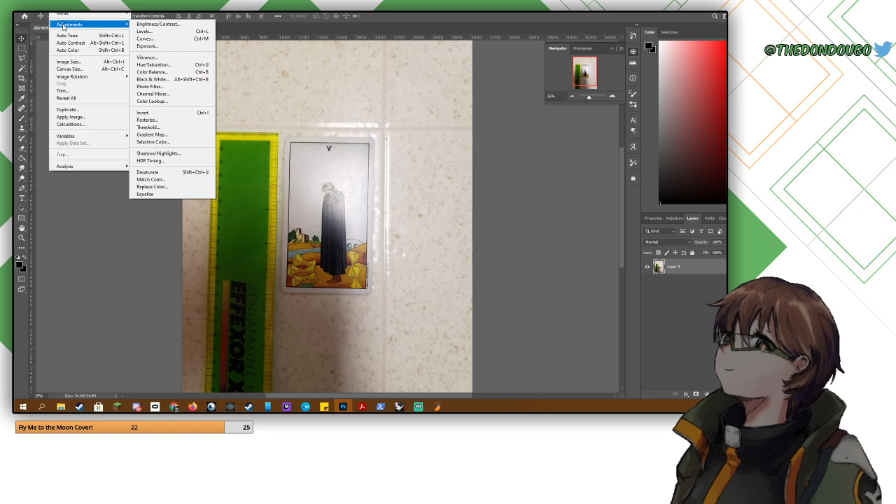First things first, I need to get this image to not be in perspective. And I have done a great job in forgetting how to do that. Image... perspective warp. I know. I know Photoshop.

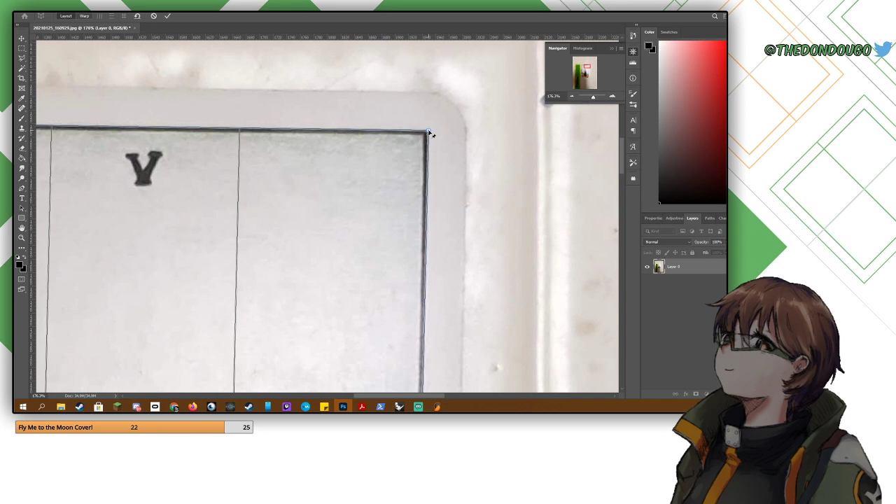Going to be using the outside for the perspective. There we go. And lastly, that right there.

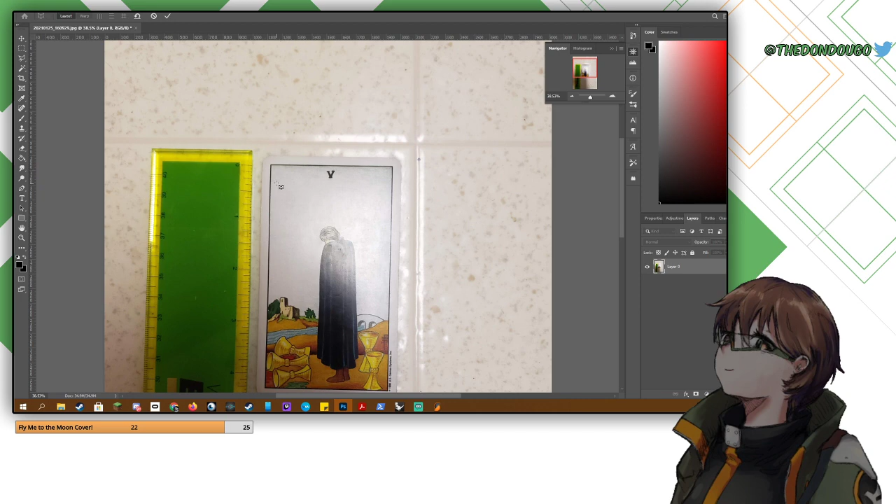Fudge, I botched it. Try again. Edit, perspective warp. Okay, is that where we want it to be? There we go, want that to be right on that corner.

That's gonna go down here. And then this wants to go in the bottom corner. Now that that's placed, zoom out, and for warp, that's what it is. There we go.

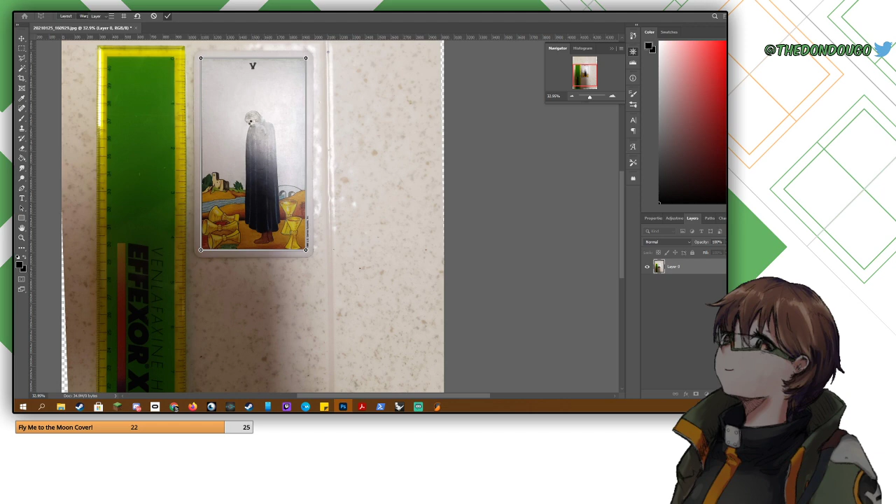Check. And then we can crop to like there. And save. File, I need to save the image. And then we can go into CAD. I'm going to put it in downloads because I'm lazy. JPEG. And okay, that's Photoshop done.

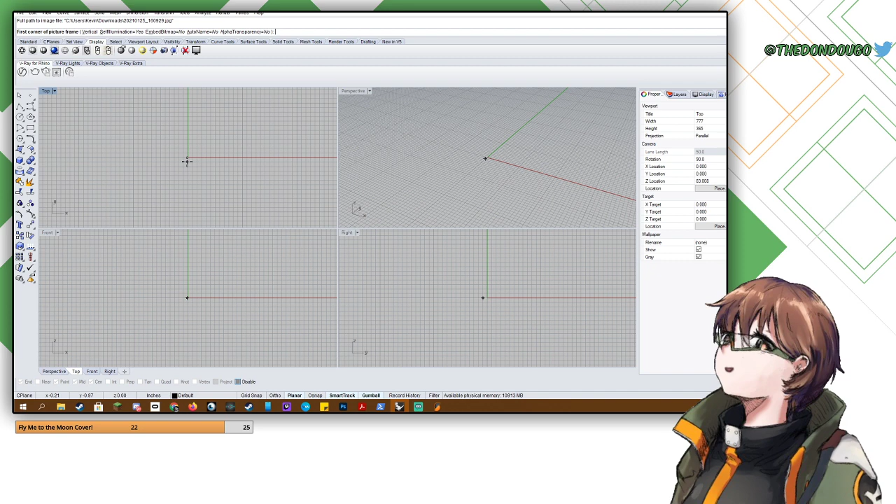Over to 3D modeling land, where first things first, we drop in our picture. Here we go. Now we need to get measurements. So what we have is we have a ruler that goes to, I see 4.5 inches. Let's just do that. Do 4.5 inches.

We need to scale this down. Where's OSnap? We need to make sure we can select the endpoint. We go down to where we think 4.5 inches is on the card, which is about there. And then we set this to, where's the end of that line? There it is. That's not quite right, I think I might have...

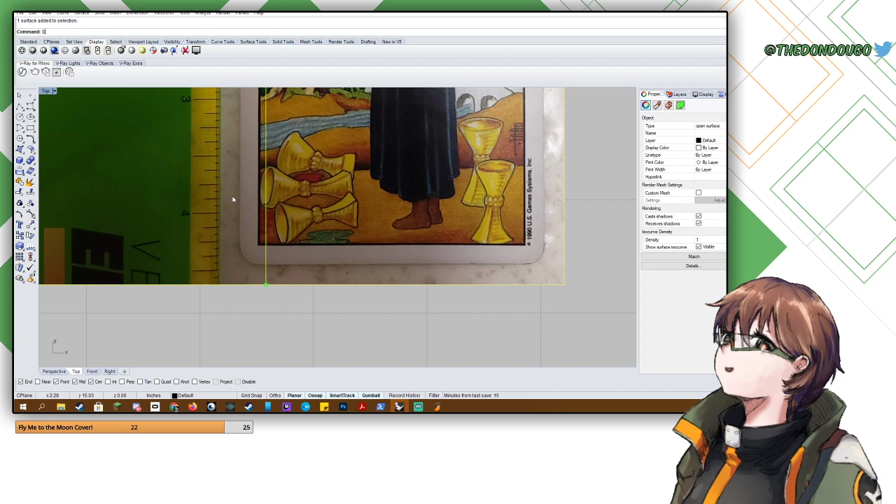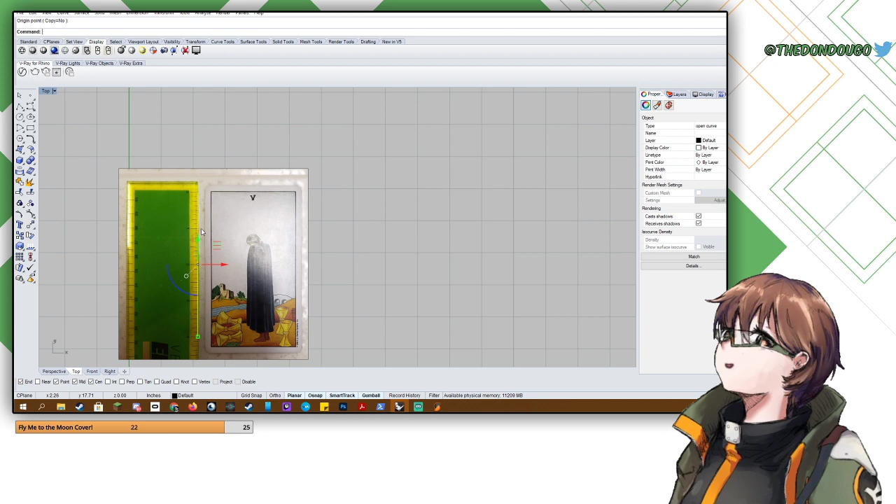Not what I want to do, undo, so we'll scale from here. Want it to go from here to there. There we go. And now we know that this line here, we've set in the 3D modeling program to be 4.5 inches. And in our image, we go from 0 to, oh wait, no, that was correct before. There we go. The line's 4.5 inches in the program, which is now lined up with the image.

So now we can actually take the dimensions of this card. The project today is we have these tarot cards of my mother's, and she really wants - she's been trying to make tarot cards herself recently, and she wants a little template that'll help her get this outline for the image. And so that is what we are making.

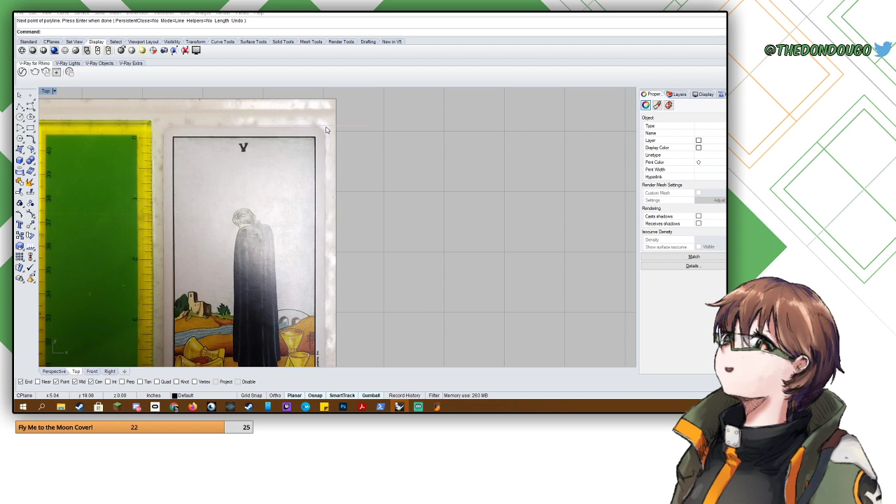I'm going to place just a filler horizontal line for now. Let's move that down there. We get another horizontal line, just filler for now. We're going to move it about there.

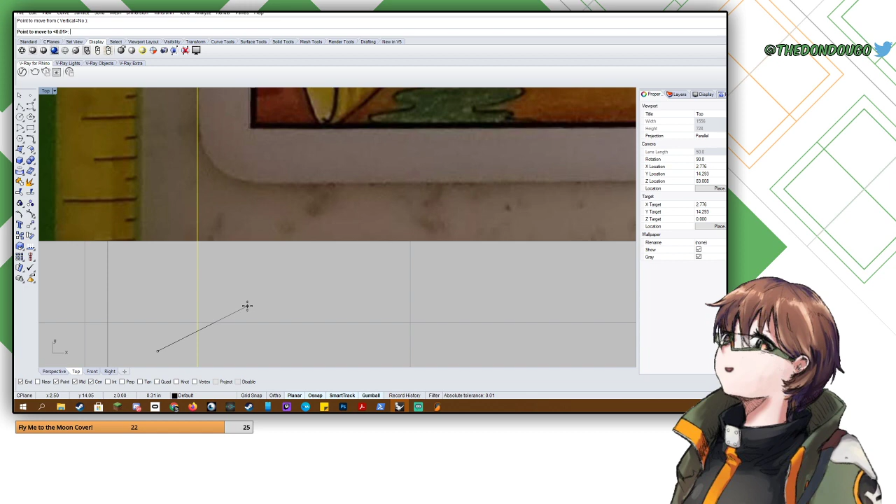And now if we can make a rectangle, we want this to be a 3-point rectangle, and we want the thing to select on intersection so we get the corner. Our height is roughly that, and that is roughly that length. Cool, and now I should be able to just copy these over, and we can start working on the side.

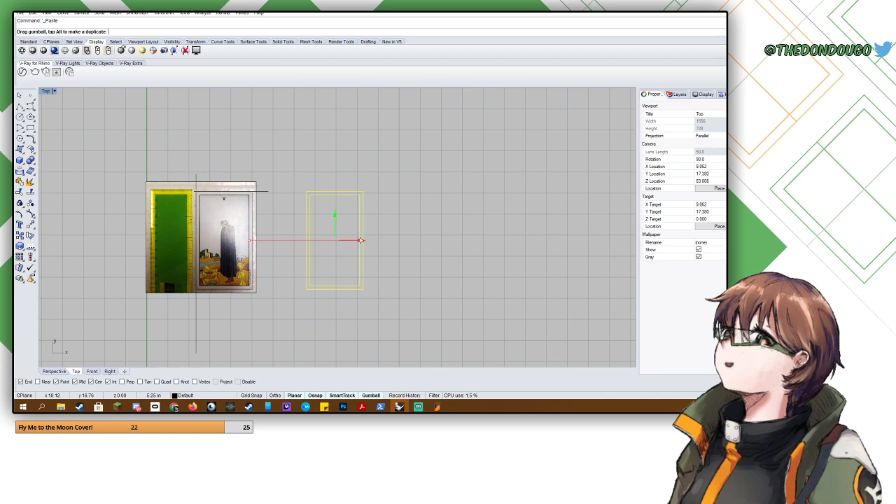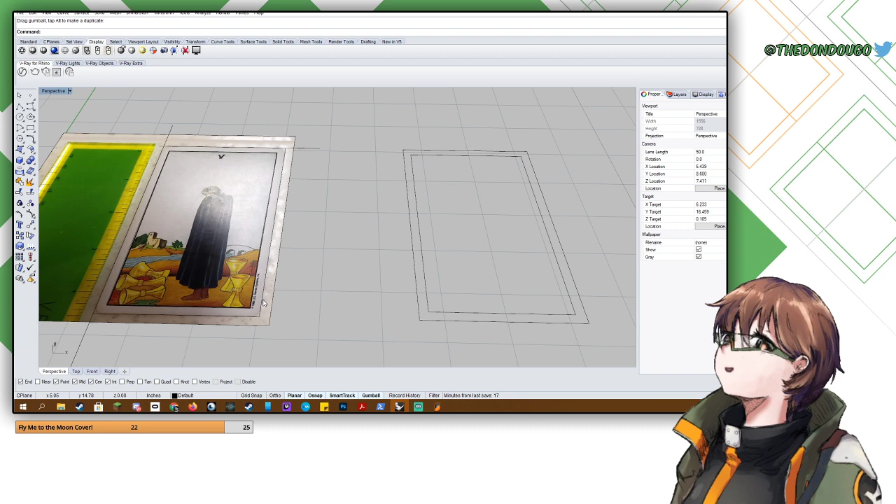Paste. Alright, so now this is the card, both the outer edge of the card and the inner area we want to be able to trace. I think what I'm going to do is have the card be able to slide in from the bottom, and then you'll be able to trace 3 of these lines and then place like a plate of some sort over the hole to get the remaining line.

Okay, so to do that, first of all, going to make a box. Doesn't need to be too thick. Thinking maybe like 3 millimeters.

Need to move to shaded so I can actually see. There we go. Ghosted would probably be better, actually. Shaded is turning the box I made into a solid. Ghosted means I can see through everything. So that'll be the base we're working with.

We then want to... I'm actually going to restart that because I want to offset the original curve. Let's offset this. How thick do we want the box itself to be? Maybe like, I think 3 millimeters again. D, we want this to be 3 millimeters. Then we click. Cool, this is the thickness of our box. I'm just going to make all the walls uniformly 3 millimeters.

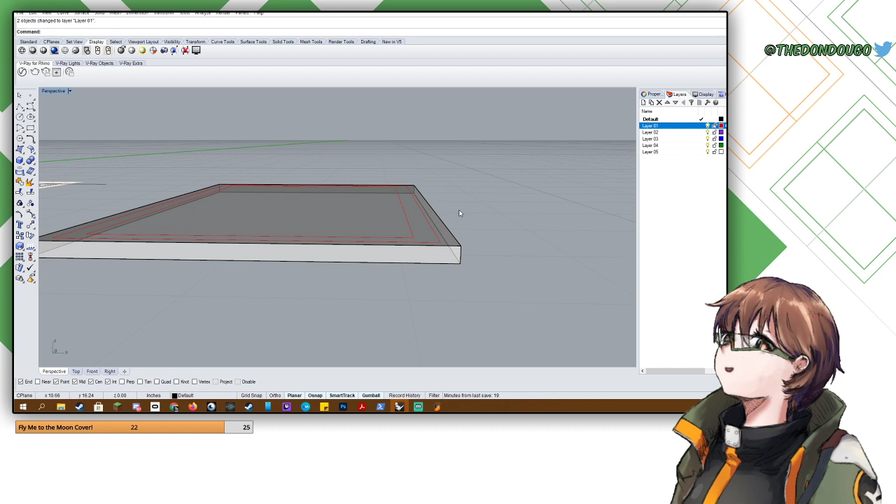There we go. I should probably move these to separate layers so I can keep track of them. So I'm going to move them to red. There we go. We want it to be able to hold the card. The cards themselves are not very thick. I'm not going to measure how thin they are, but it's slightly thicker than a sheet of paper.

So let's see, first thing we want, we're going to want another box. Let's see, let's do the inside box first. This is going to be the box to house the card. For height, I'm going to go with 3 millimeters for simplicity. And then we have a second box.

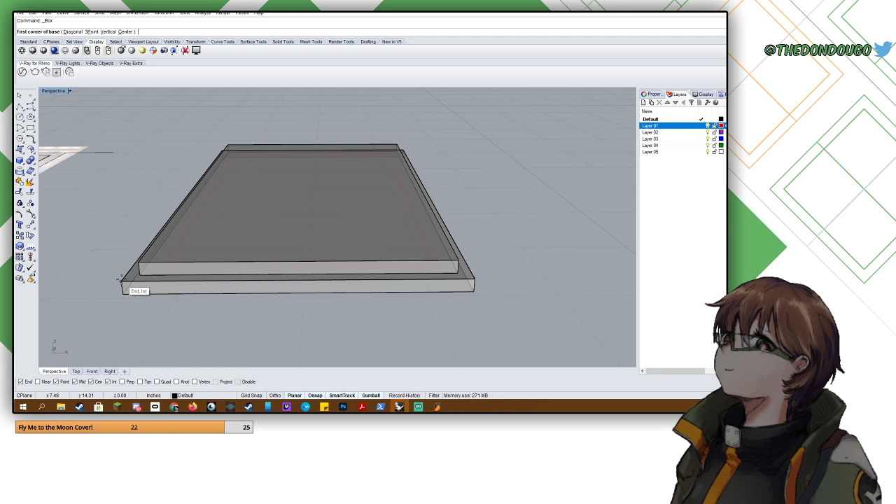Goes from here to here, again 3 millimeters. And then we can take this. I think we can scale it up a little larger, and then we can do a boolean difference — we want to subtract that from that.

And now we have something that the cards can slide into. We want like some sort of lip that holds it down.

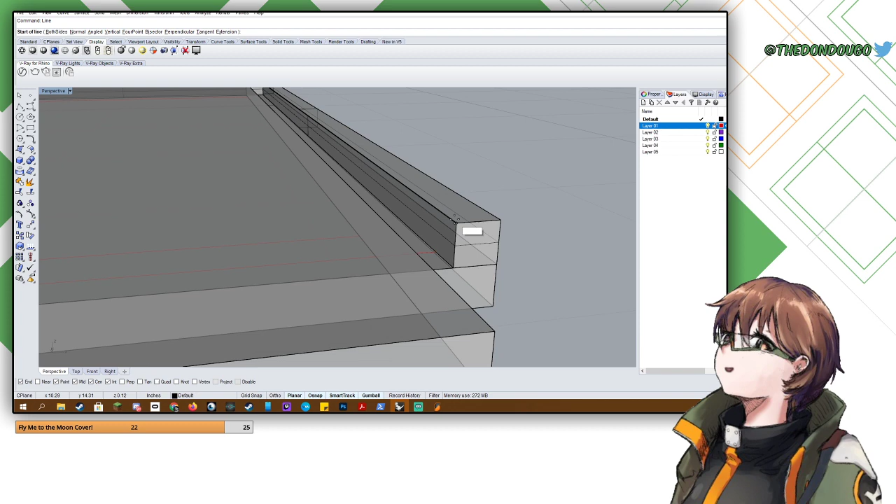I think what I'm going to do is make a little curve, so let's get our control point curve. Actually, first I'm going to get a reference for where this line is going to intersect. That's not what I wanted — try again. There we go, yeah, that's what I'm looking for.

I'm going to get a control point curve. I want it to go... not quite like that.

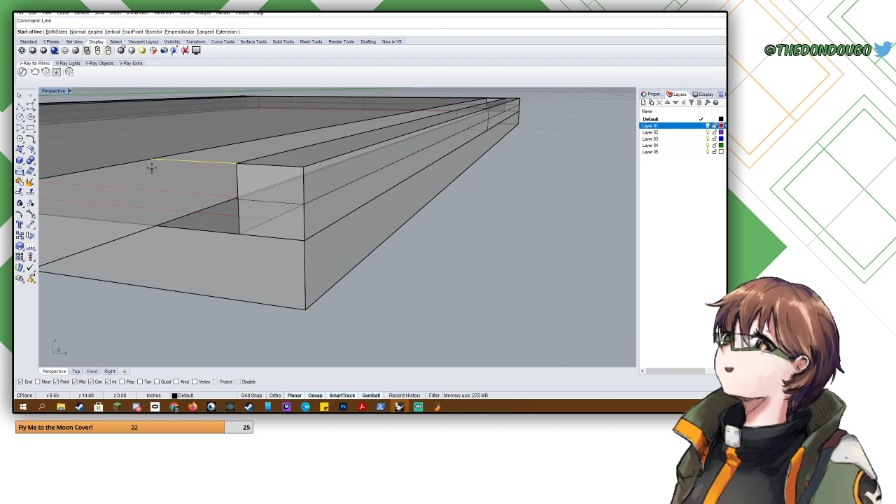Something along those lines. Actually, a good thing to do might be to grab our midpoint here, draw that across. There we go. So now if I do a line like that... that's still a pretty sizable gap, I might go even further down then.

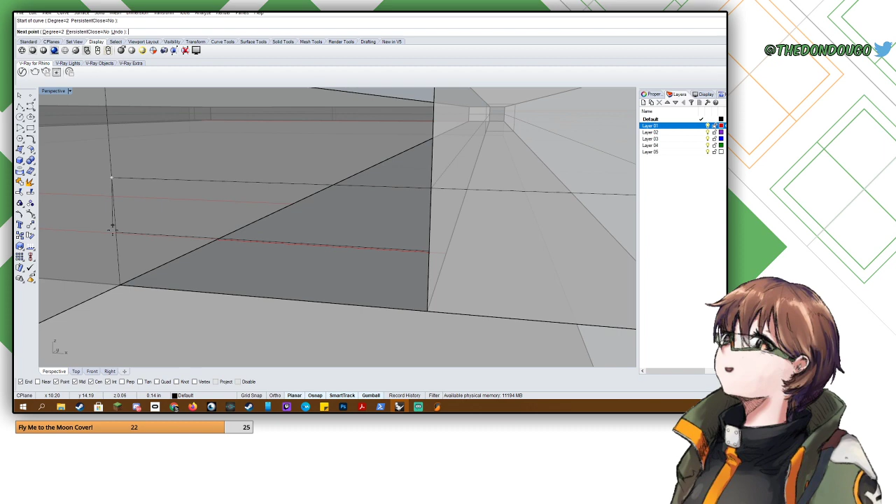Alternatively, I could just start from here, in which case I want the midpoint of this. Grab that, draw it across. There we go — and I am doing this maybe a little lazily. There we go.

And then if we trim that, then these we can join — actually, we can do one better. We can make that, join that curve and this curve to make a solid curve. We join it, and then extrude curve. There we go, and that makes it solid.

We can get that on that side, and then we can just mirror it across to the other side.

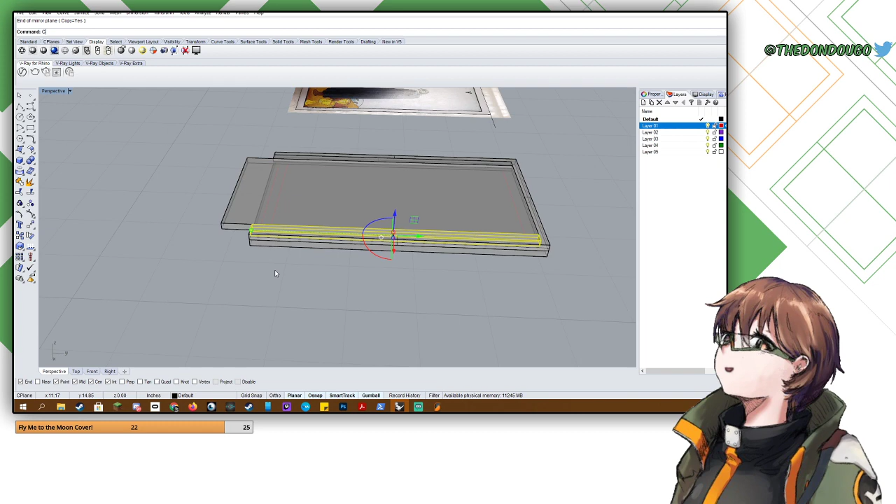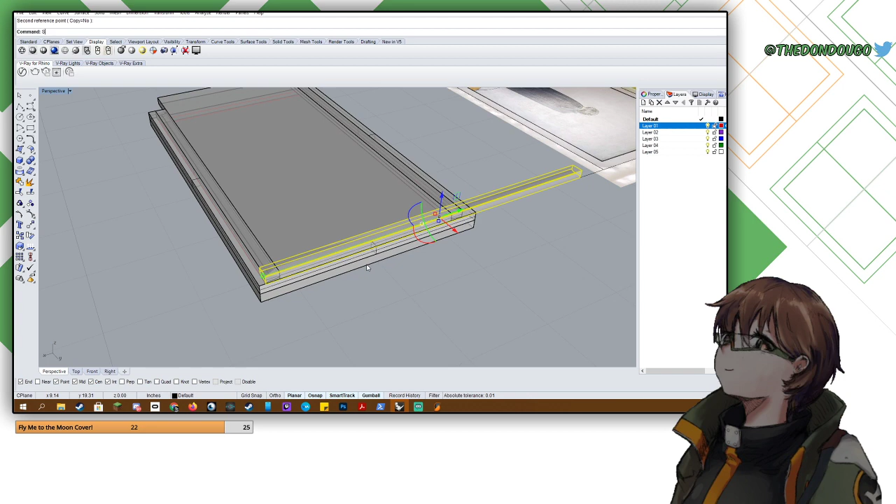And then the last thing we're going to do is copy this to here. That didn't quite grab from the place I thought it would, so we're going to move it up, up. Going to rotate 90 degrees, and do a one-dimensional scale operation. And there we go.

Now, if we hide that, we should have something that we can both slide the card into, and also it has enough of a lip along that curve to easily trace that outline. That's the idea, at least.

Cool, so let's see, next thing we need to do — let's actually join these. Also, I guess part of the hope is that the printer's able to handle this curve. It'll handle this easily, but once it gets here, I'm actually not as confident. That's something we'll have to see.

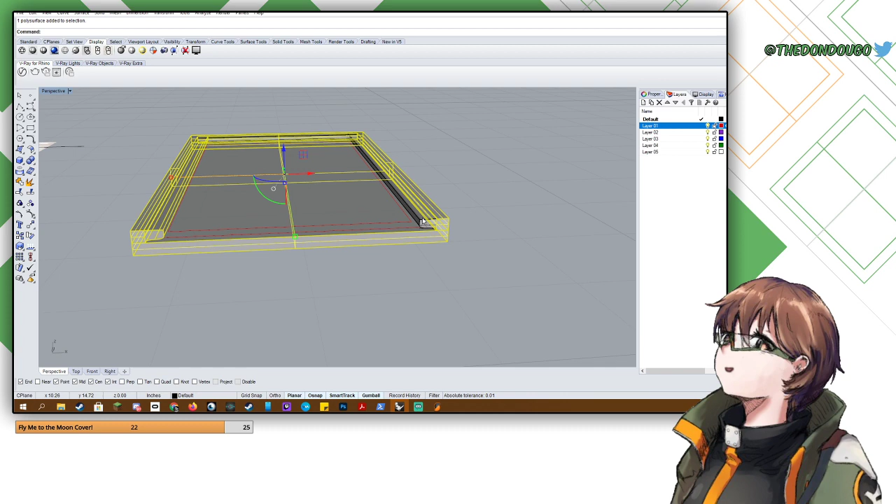Worst case scenario, we can print that with supports and then kind of just carve them back out. So I'm going to take all of our solids, one step at a time, and just Boolean union them together. There, that's now a solid that can easily be 3D printed.

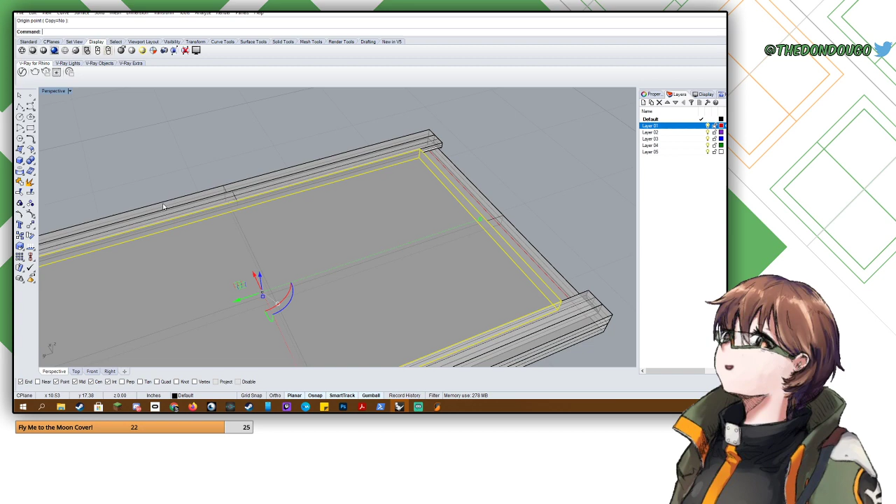Next thing is we need to have this line, so we're going to show our box again. Scale 1D — boop, boop, that selected to the center, so we're going to try that again. Scale it down to that inside line, and maybe just a little bit past that. Wait a second, that's still back there, so we need to move it out and then scale it. There we go.

I am also going to, let's see, so once you slap that down, you're able to grab that line successfully. There is another line on the cards that are the major arcana — they all have titles, and they have a little box there. So I think I'll basically make two of these.

One that's for this bottom line, and then one that's... actually, I take that back. I have a better idea, which involves... actually, let's redo these. We're going to copy this, undo back before I Boolean unioned everything.

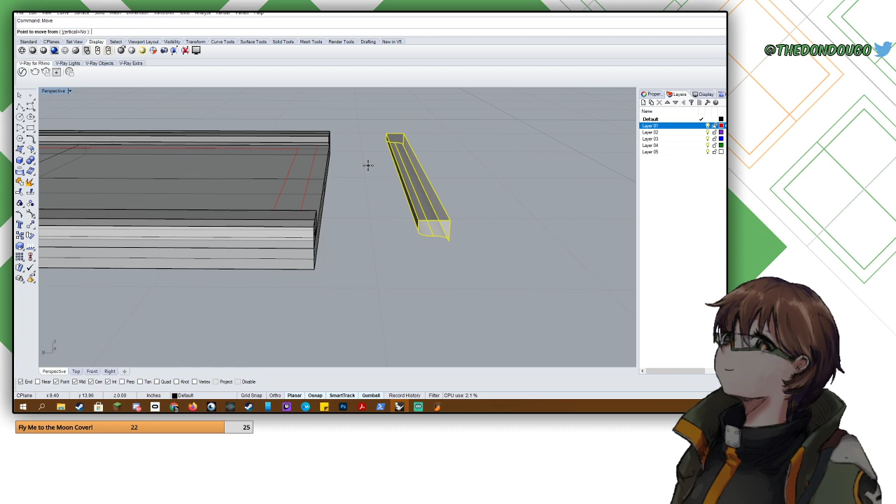So we can paste this back, just going to copy this over here. Now we're going to hide this again. Going to rotate this around, we want to move it so this point lines up here.

And then from there, we can just do a move back up here. And we're also going to want to cut out a good bit. I think I'm actually going to do something a little strange — not what I want to do. Take this, I'm going to rotate up.

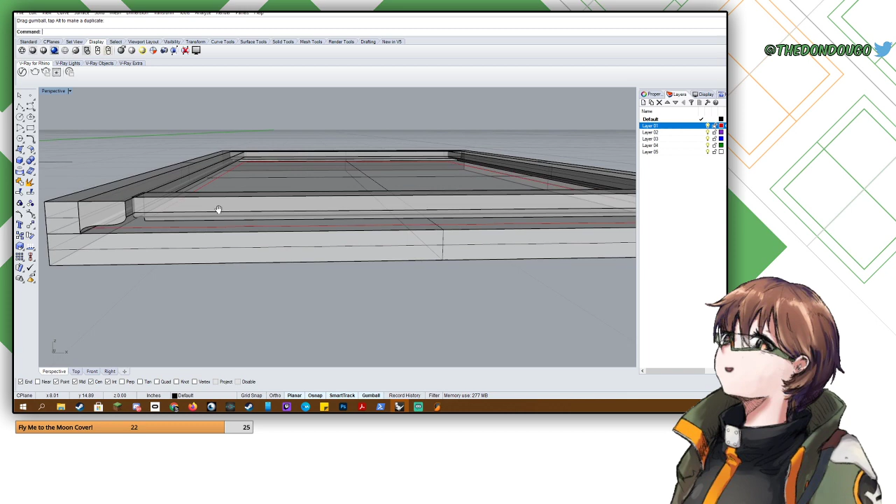Rotate around this way — I'm going to see if I can make it easier to slot the card into. And to that end, I actually want to fillet edge. Fillet that — we want to, okay, we're going to need to do radius first.

Let's do like a 0.05 inch fillet. We want to fillet that edge and that edge to make it easier to get the card into. Yeah, there we go, that's a nice smooth edge. And then we want to...

Because I do like the idea of this just being an easy outline right here. And you can just push to make sure the card is in all the way. And then you have a box that you put down in the center if you want the other template.

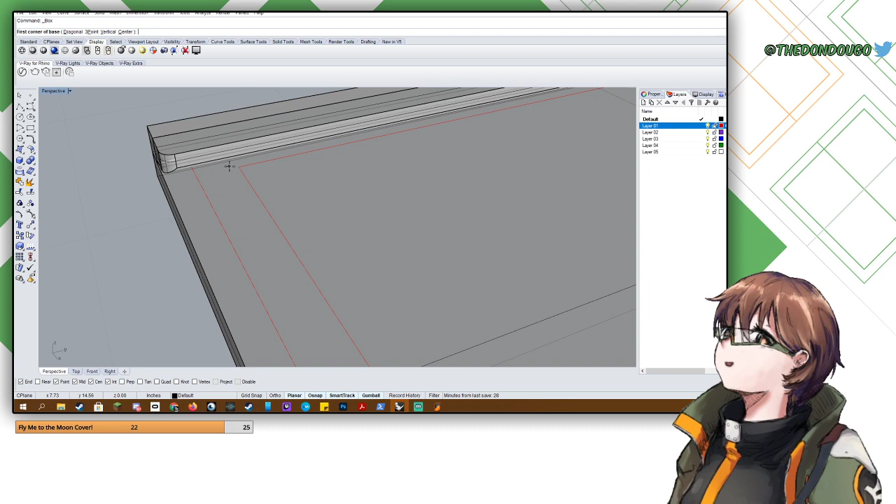But I think we're actually just going to have to model this in a slightly different way. I'm going to start with a box. Many good things start with boxes.

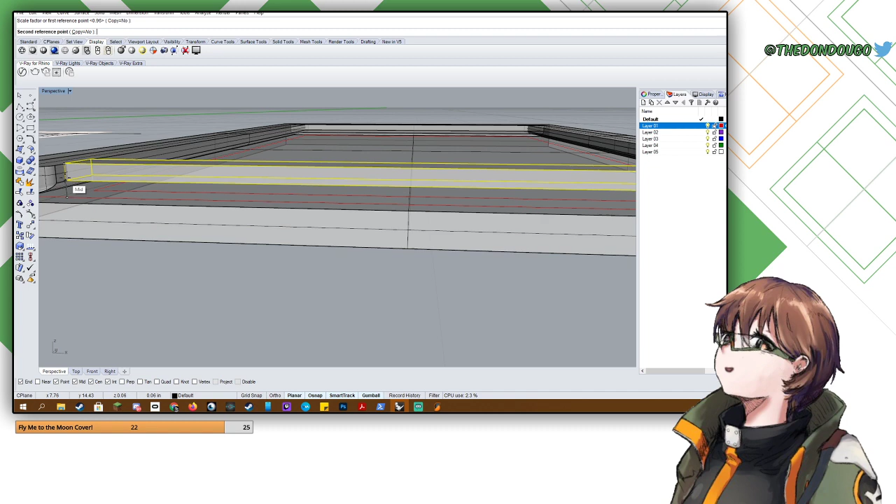And then I'm going to do this. So this will end up needing support material, but then we can Boolean union.

All these, and then we can fillet edge, just to try to make this whole thing smoother. And then also we want to make sure all these edges here, all these hard edges are nice and smooth, because it just makes the user experience nicer if you're not touching any hard edges. Have to fillet these bit at a time.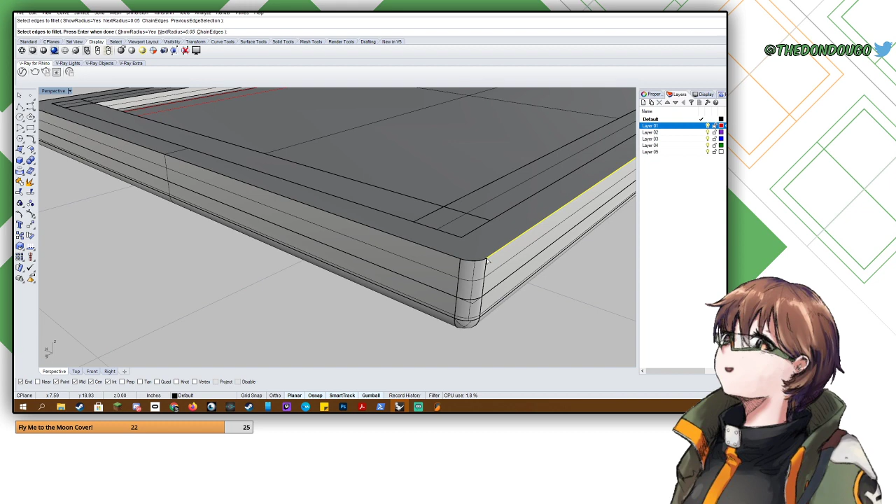I have to go to shaded view to get a better sense of what's going on. Fillet this edge as well. So I'm going to undo these last fillets so I can make sure I get all of these as one long edge.

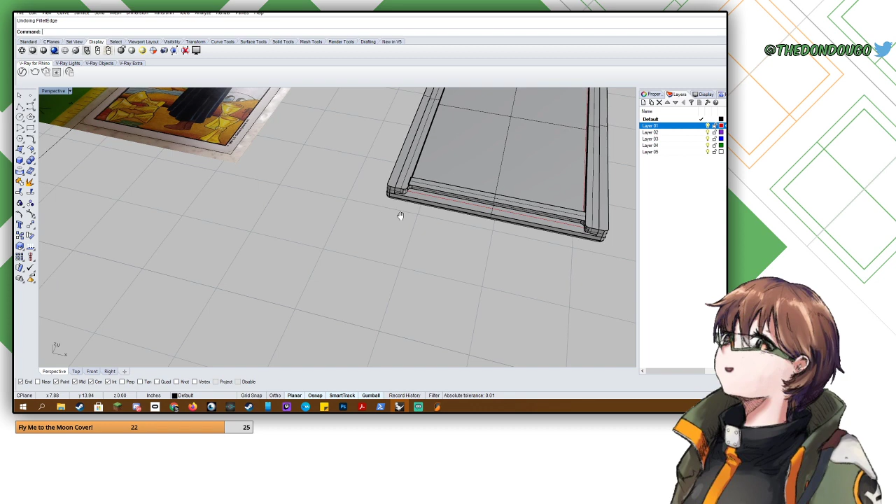Yeah, didn't like that. So let's try that one more time, but this time we just won't go all the way to the edge. Might not look as nice, but...

Okay, maybe... why is it doing that? I guess it's because this edge was already filleted. Okay, so the top might just be a little rough then. That's fine.

Alright, so we have these four sides. The next thing we need is like the little interior plate. So I'm going to go to the blue layer for this.

I need to make a quick measurement real fast with the card that's right in front of me. I need to see how tall this extra section is. Let's see, is this centimeters on that side. Does it measure nicely in inches, maybe? It does.

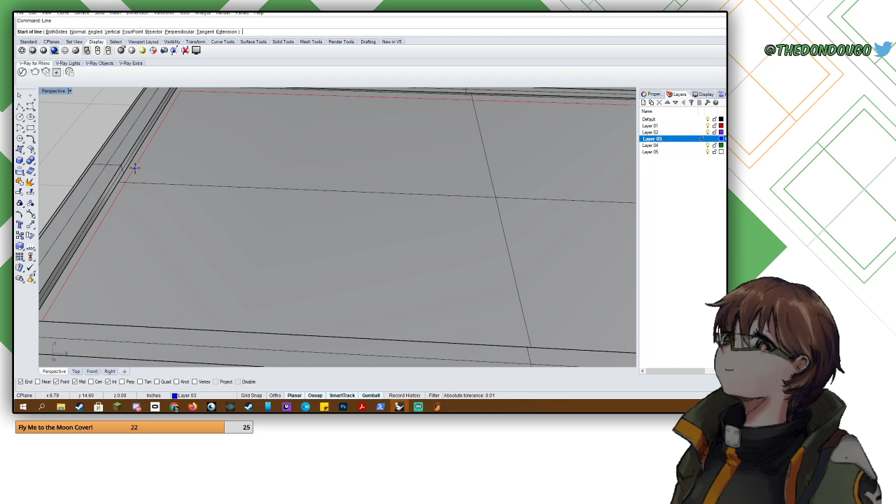It is 3/8 of an inch tall. We can do that. I'm going to make a little line, not from the center, 3/8 inch. So that's how much room we need to not include in this.

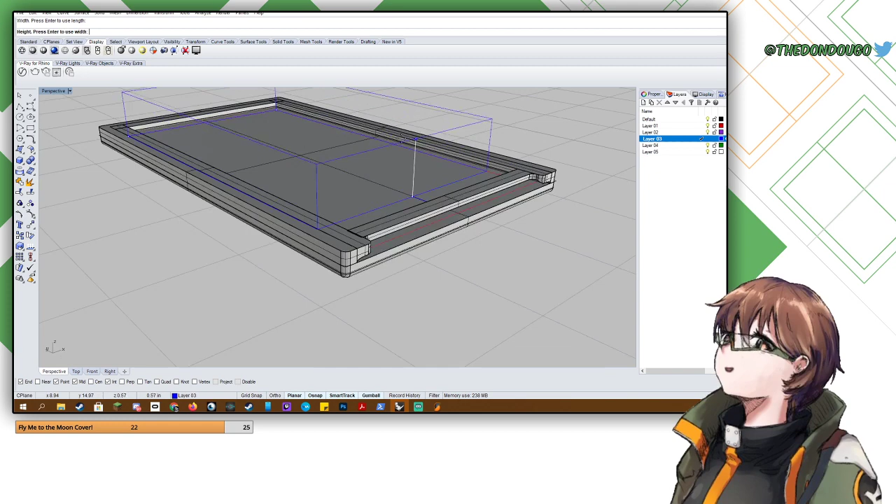Next thing we do, get this. 1, 2, 3. I think I want to go up a little taller than the box itself. That doesn't look right.

What I can always do is just give it a little shrink, because when you 3D print things, dimensions aren't always perfect. So it's also just nice to have some wiggle room. And also, I mean, there's the thickness of a pen or a pencil. So I'm gonna shrink this down maybe a little bit more, just a tiny bit. There we go. Nope. There we go.

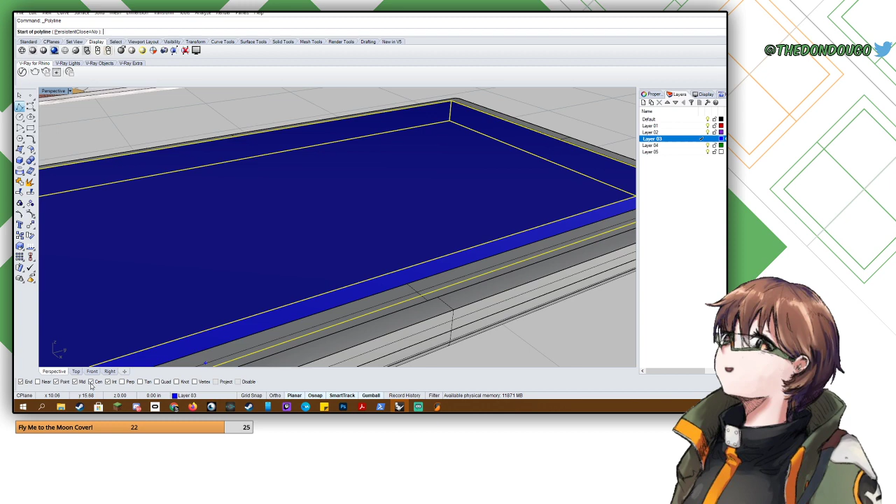All right. Now we actually do want the little center function. I want to make a nice little handle on this that you can easily pull it up and push it down with.

Okay, point. There's Osnap is on center. Oh, it was there for a little bit. There we go.

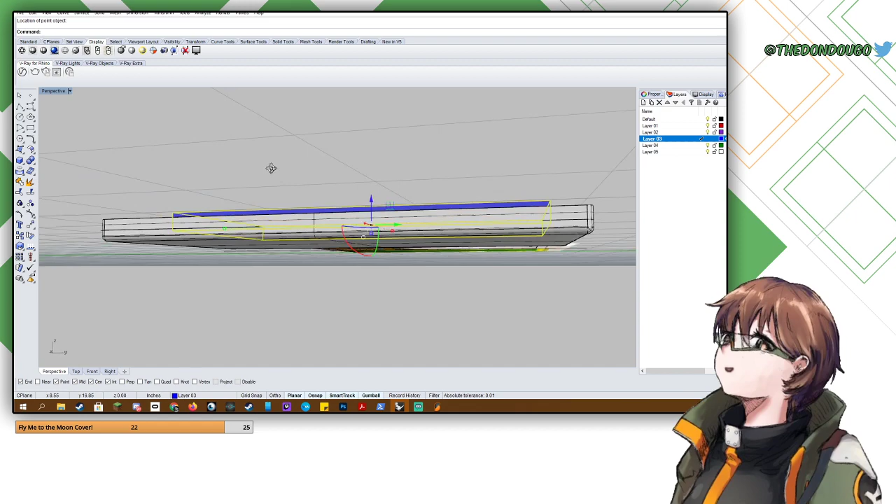Okay, there we go. We can use this to make a line. I want this to be a nice vertical line, because what I'm going to do, I'm just going to kind of wing it. I'm going to try that one again.

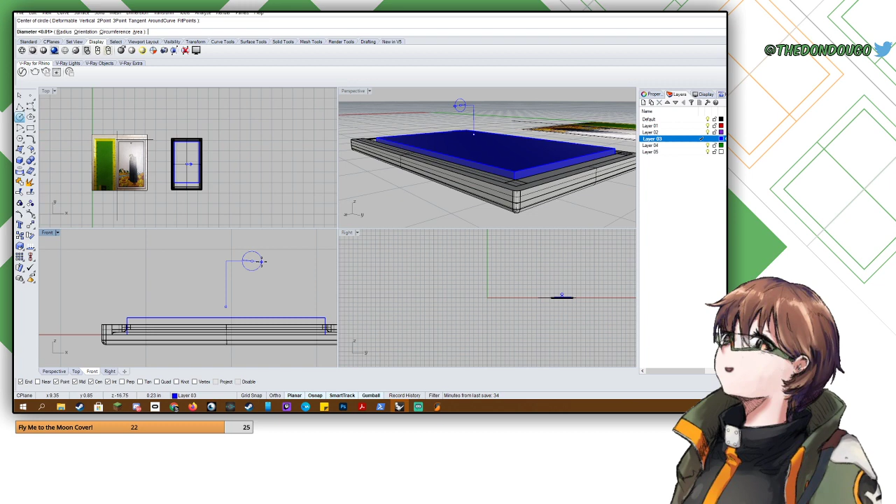Okay, then we're going to have a circle. Let's say maybe that large. And then what I'm doing is I'm basically designing the handle in profile right now. So this would be what it would look like from the side if cut in half.

Control point curve. There we go. We're going to use this to actually, we don't want it to go all the way. We still want some width. There we go. That much.

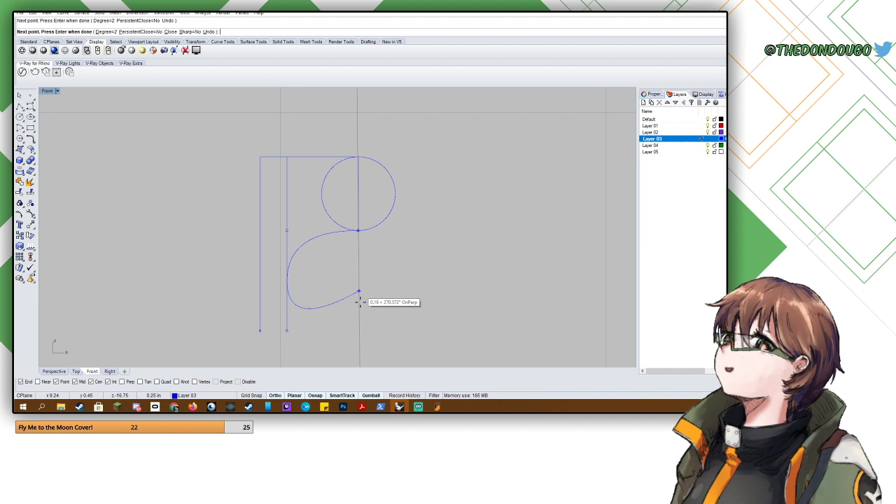1, 2. Make sure we smart track to that. There we go. Use these to trim.

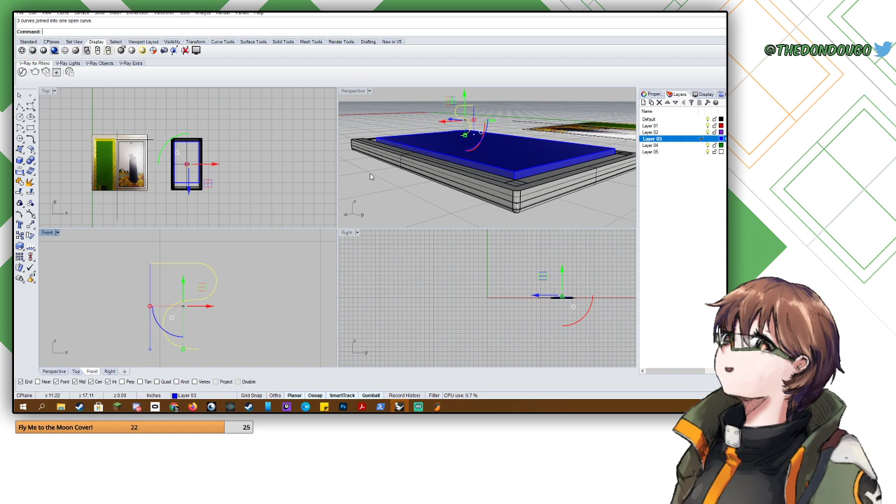Then what we can do is we join all of these back in perspective view. We get this. We're going to revolve around this axis. And there we go. We get a little bit of a derpy looking handle.

And then we move it here. And then we'll just slide it back up.

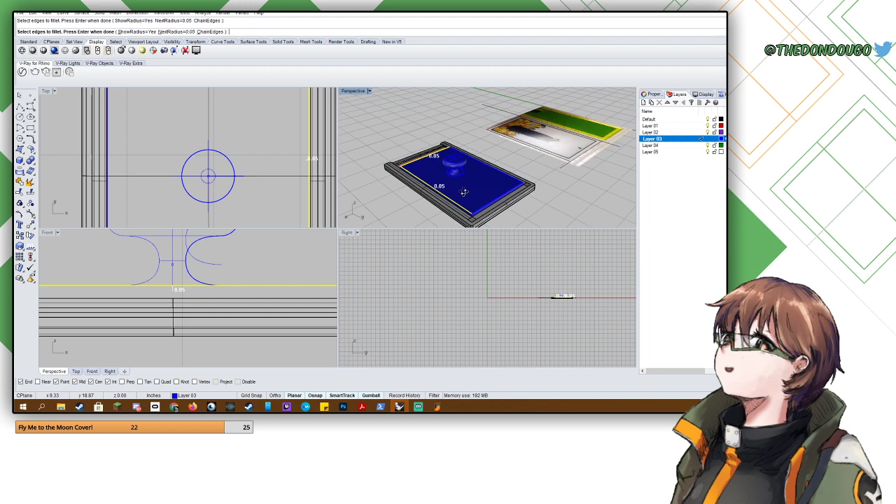There we go. I'm going to fillet at the edges, because that's nice. Actually, I'm just going to fillet at the top edge, and keep the side edges hard so that they have nice contact with the box.

There we go. And then we can Boolean these together, so that's a solid. This is a solid.

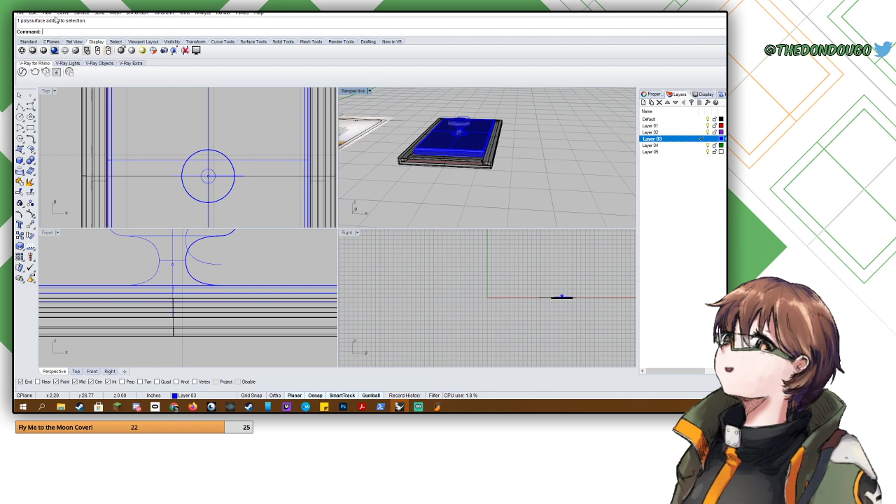So what we do is I'm going to save this real quick, and then we're going to go over to the 3D printing phase. Let's call this Project Tarot Outline. How long has this taken? 25 minutes? Oh, we're making great time.

All right, so now we have two parts we want to 3D print. We have this blue inside part, and then the outside box. So what I'm going to do is these one at a time. File, export selected, and for our file type, we're going to do STL.

I know you can't see this because it's on my other monitor, but I'll try to keep this fast. STL stands for stereolithography file. It's a way to encode 3D data.

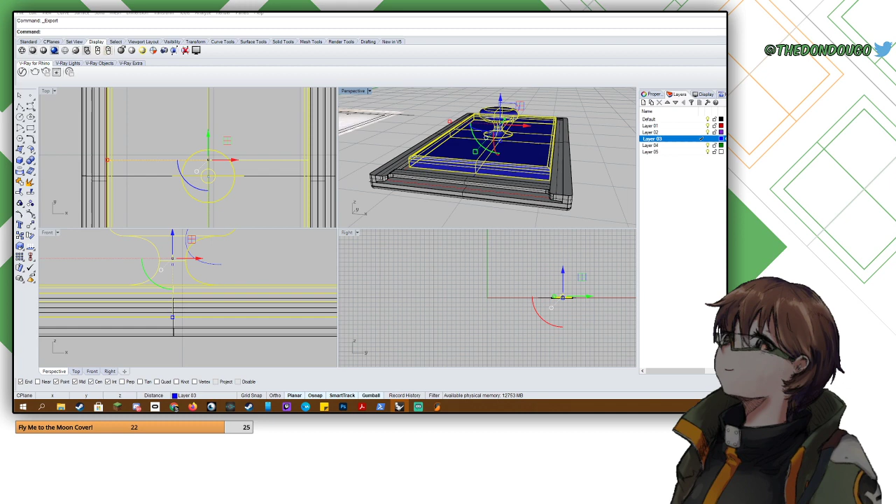We're going to save. Oh, before we do this, actually, one big thing we want to change: units. Right now, this file is in inches. We want to change it to millimeters, because any manufacturing program worth its salt works in millimeters.

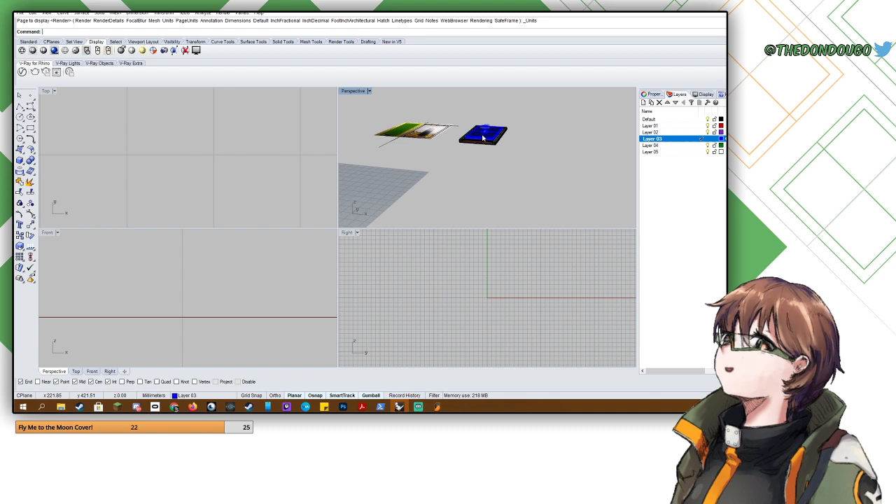There we go, and now the units are in millimeters. When we export it, it'll try to read those units as millimeters, because units themselves aren't saved, it's just the value of them. So if this is like 25 millimeters, if this was in inches, it might read, I don't know, 8, we'll say. It's probably wrong, but it'll say 8 units, and when we go to the 3D print program, it'll read those 8 units as millimeters, so it'll be really small, and you'll need to multiply it by 25.4.

But if we just export it as millimeters, then everything works out fine. Okay, cool.

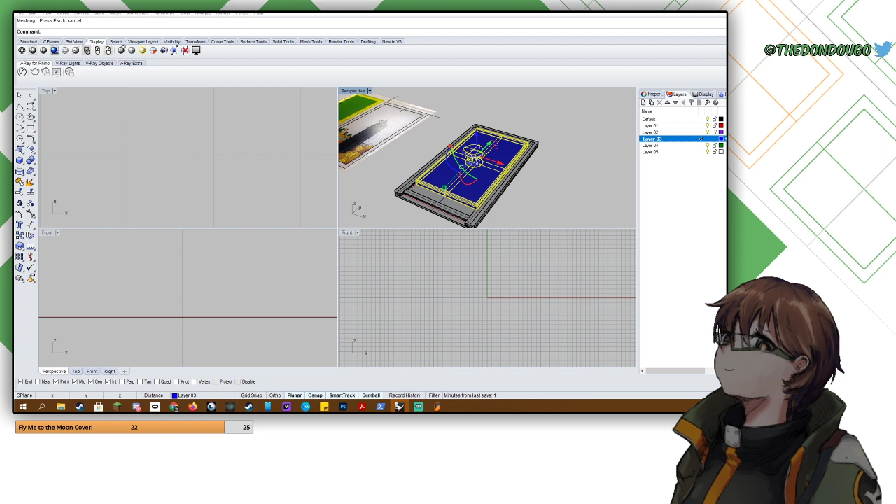File, export selected. So this first thing, we'll call it STL, and we'll call it Tarot Knob. That doesn't seem like bad wording. Save that. We're going to encode it - there's a few export options here, either binary or ASCII. We're going to use binary because it's smaller. I don't know why you'd use ASCII, honestly.

And then file export selected. I'll call this Tarot Box. We'll do template - I think somewhere else on my computer I already have one called Tarot Box. And once again, I'm going to do this in binary.

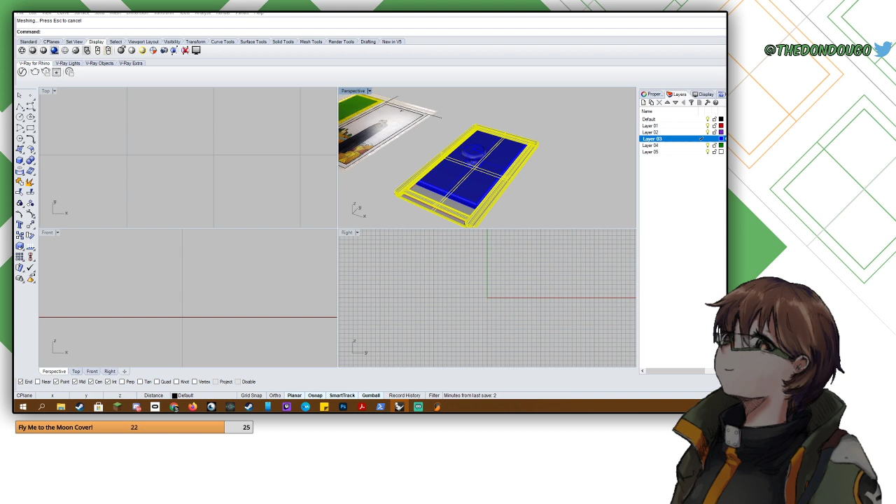Ooh, okay, I just saw an interesting pop-up. So what we're going to do is the show edges command. We can see on this top piece, we have 22 edges total, no naked edges, no non-manifold edges. That's what we want.

And now what we do is we're going to remove objects, add objects, and we can see 12 naked edges. Where are those naked edges?

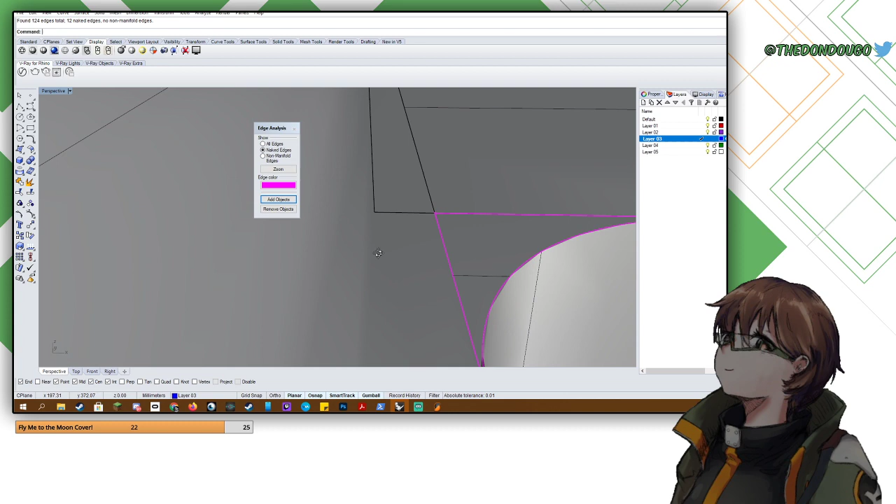Okay. Why are those marked as naked edges? That means somewhere in Rhino - yep, there it is. There's no actual surface there, is there?

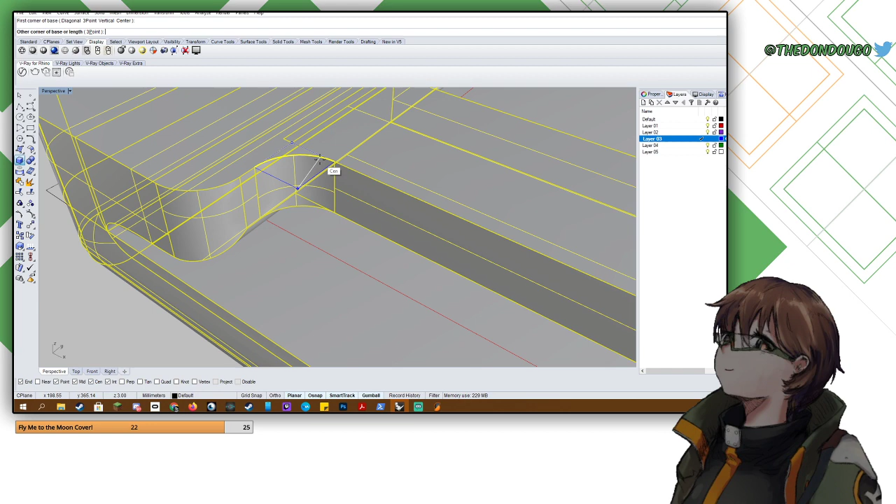Okay, well in that case, what we're going to do - that's a hard fix. Let's see if I can rebuild these edges, basically. Do this.

We want distance - I just want the length of this side here, 1.27. So we're going to fillet edge. We want the radius to be 1.27. We're going to fillet this edge.

To fillet surface. Not what I was going for. Undo, please.

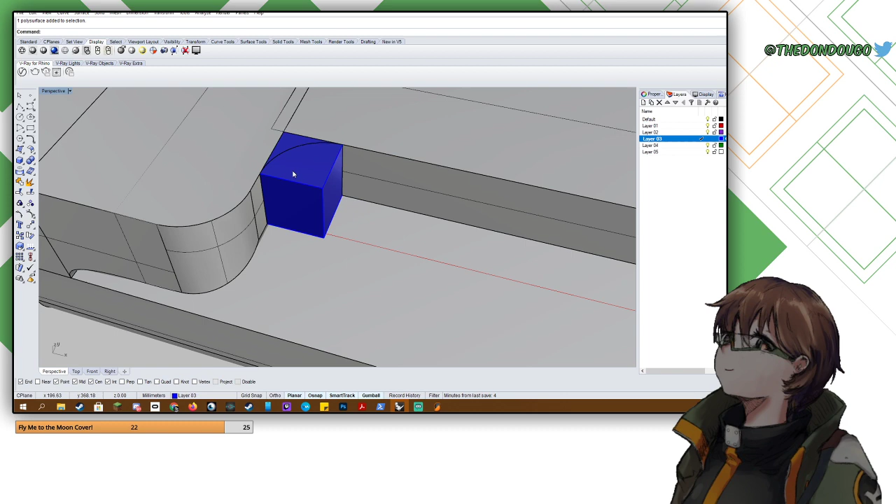Here's another idea. What we can do is grab our circle - just double checking that, yep, that is indeed a circle. We're going to take this, we're going to extrude it. We're going to subtract our new cylinder from this.

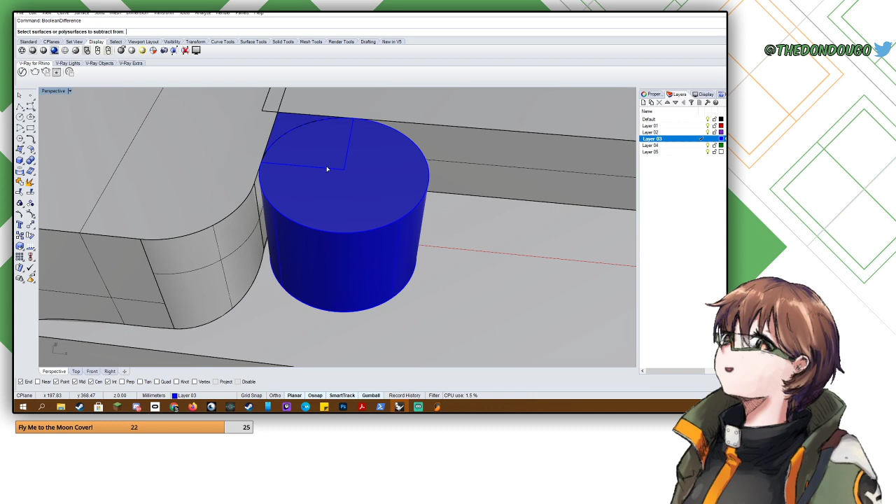I did it the wrong way. We're going to subtract from this, taking out that. So now we have this solid, which I'm going to mirror over.

And then, actually, I'm going to undo that because we want to scale 2D. I'm going to actually scale it up and then mirror so we make sure that we cover the bad area.

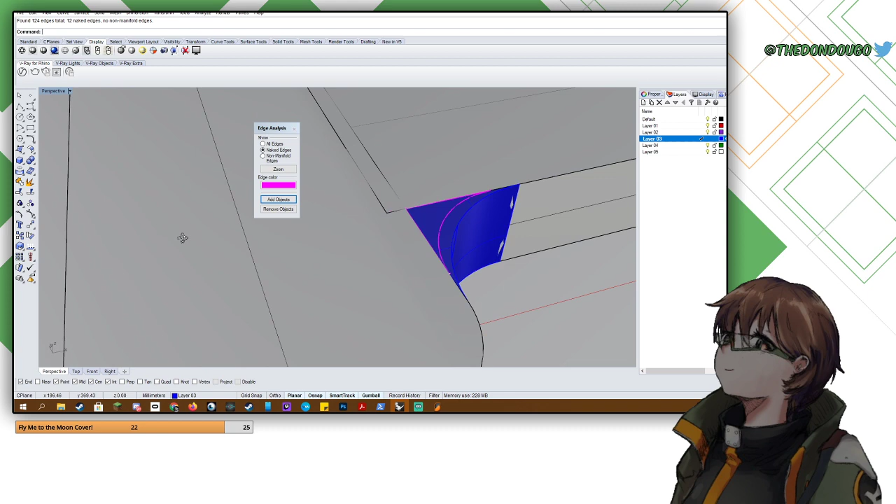Then if we join these, still got those naked edges. I wonder if - I'm going to check something, because I think it doesn't matter for this case, because that area is still solid. The 3D printer should read that as an error, but it shouldn't change anything.

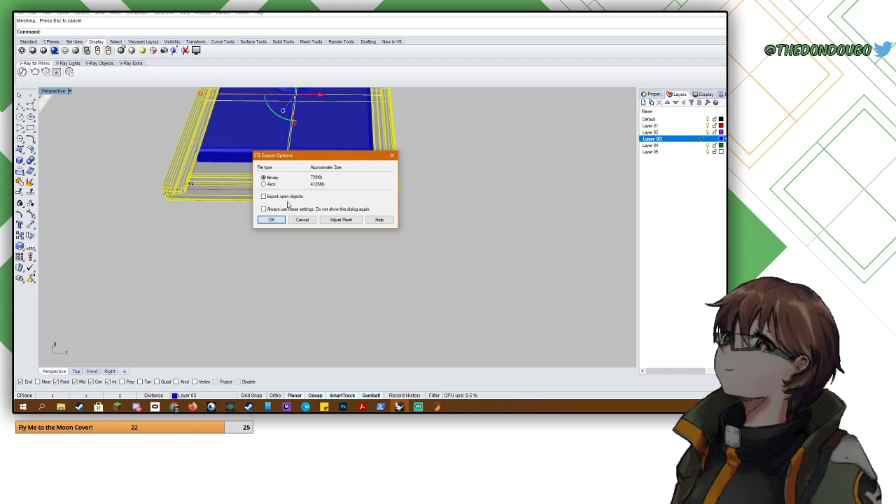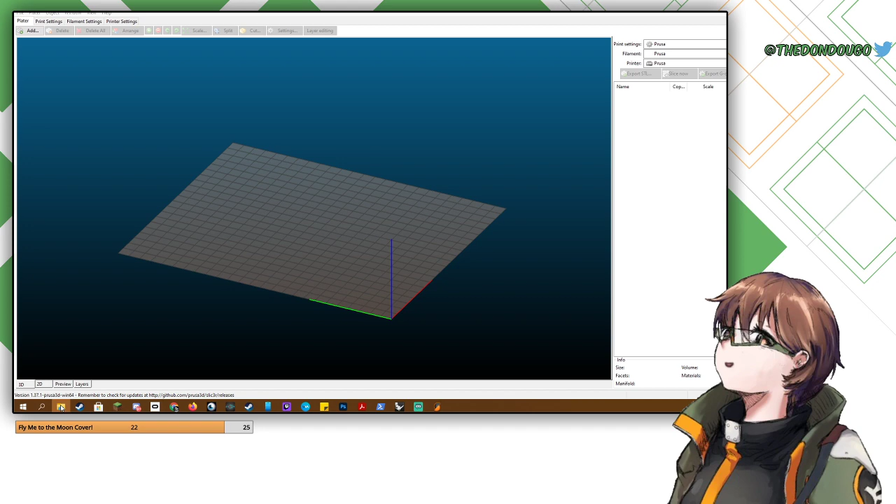Next, we go to Slic3r for Prusa. This is a slicer - it takes 3D models inputted in STL format, and it turns them into gcode, which is the code needed for a 3D printer to actually print, because 3D printers need tool paths. They don't care about the 3D model, they just want things to go from point A to point B.

And okay, so you can already see that the 3D print software was more than happy taking this as an input. Just checking, because that doesn't look right. Did I forget? Yeah, I think I forgot to add back this final box area in the back.

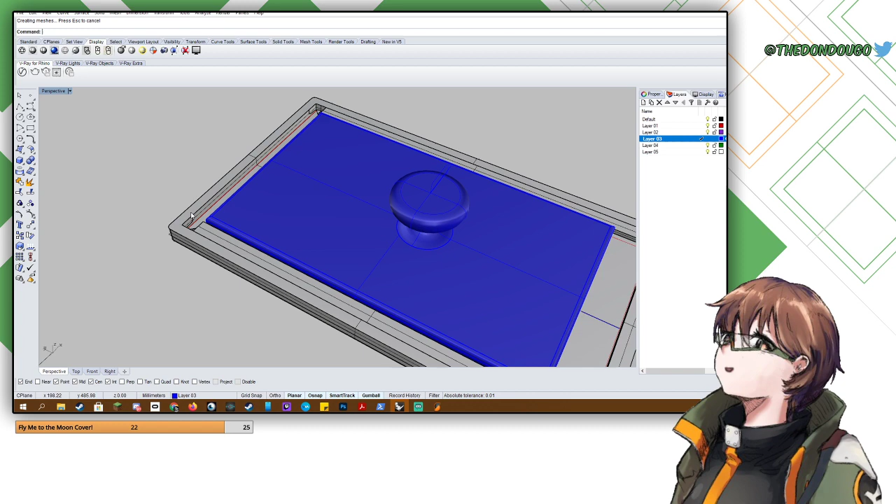So I'm going to go back to Rhino, I'm going to double check. Yep, that's its own object. I'm going to Boolean union that. That did something.

Boolean difference. Going to subtract from this, subtract with that. Did it work? No, it did not.

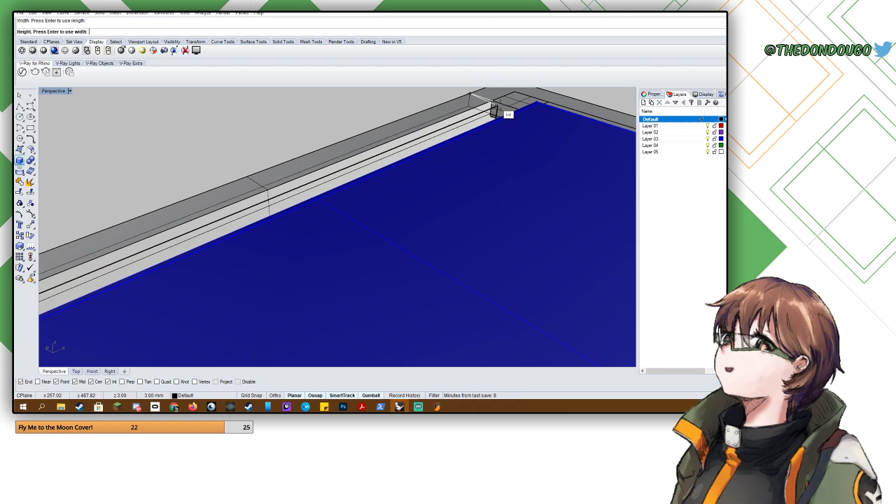There's always another option, and that's doing things in a slightly lazy way. Just like before, where we had a box. 1, 2. 3, and last point goes there, 4. That out of the way.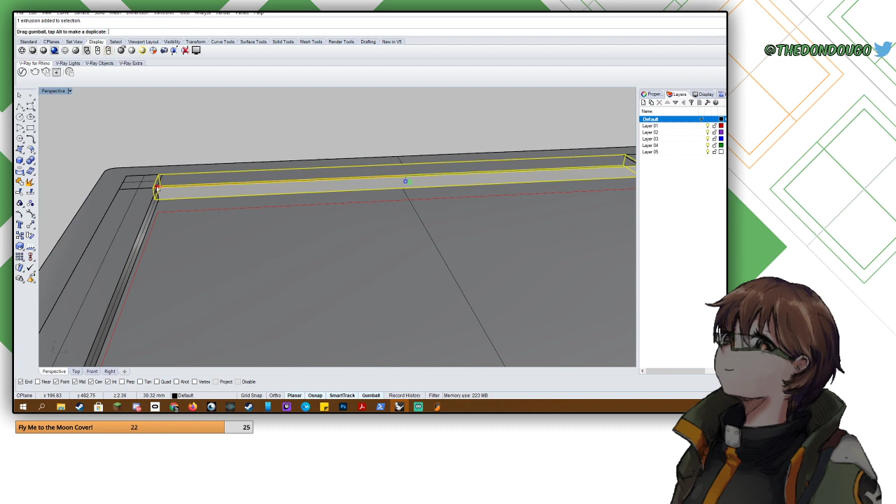Man, it really doesn't like Boolean unioning this. I bet it's because of these non-manifold surfaces, it's having trouble reading what's supposed to be inside the shape and what's not. Which is very strange. Rhino, you usually do a better job than this. Not gonna lie, I'm a little sad.

But okay, we're gonna move that a bit. We're just gonna try this again. Okay, so on the off chance that is not working. Oh, Lord.

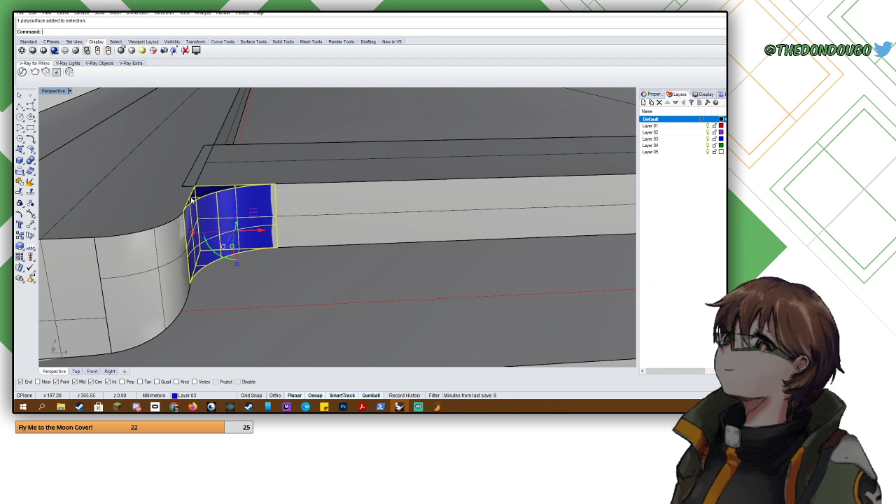I'm gonna explode this. What we're gonna do is explode this so the whole shape is nothing but a bunch of empty surfaces, and we're going to patch up this hole manually.

Let's see here. How do we want to do this? Where's the vertical plane? 1, 2, 3. 2, 3. 1, 2, 3. 1, 2, 3.

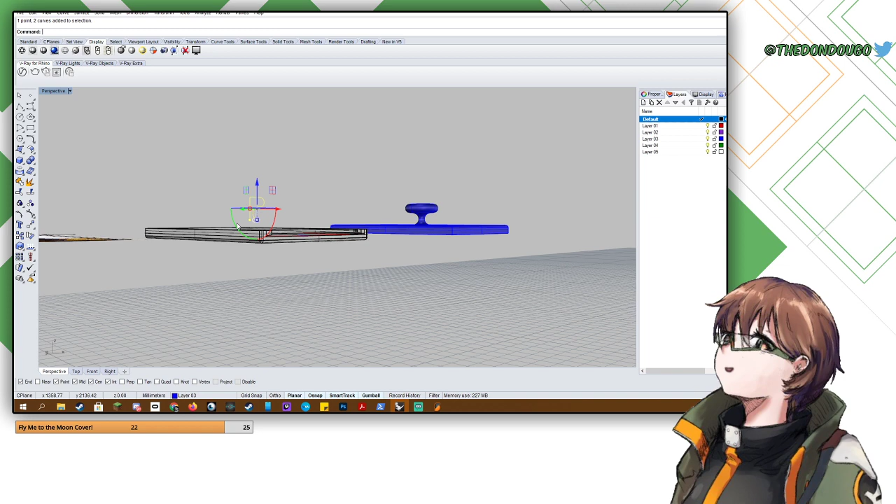And now I'm going to also clear away some of these other lines that I don't want in here, so we only want surfaces. Actually, what I can do is just SelSrf. Join. Get rid of these. There we go. Join.

Show edges. 122 edges total. No naked edges, no non-manifold edges. Cool.

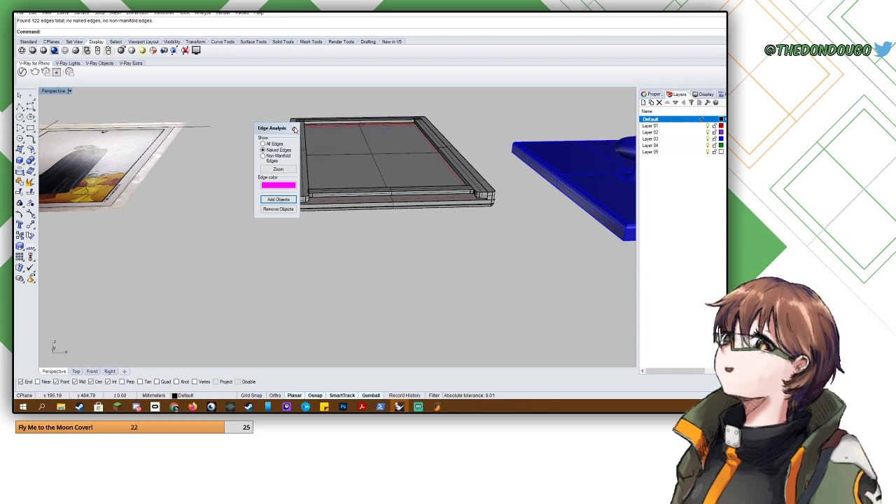Wait a second. Oh, that's wacky. So these poly surfaces here joined well. That's real wacky.

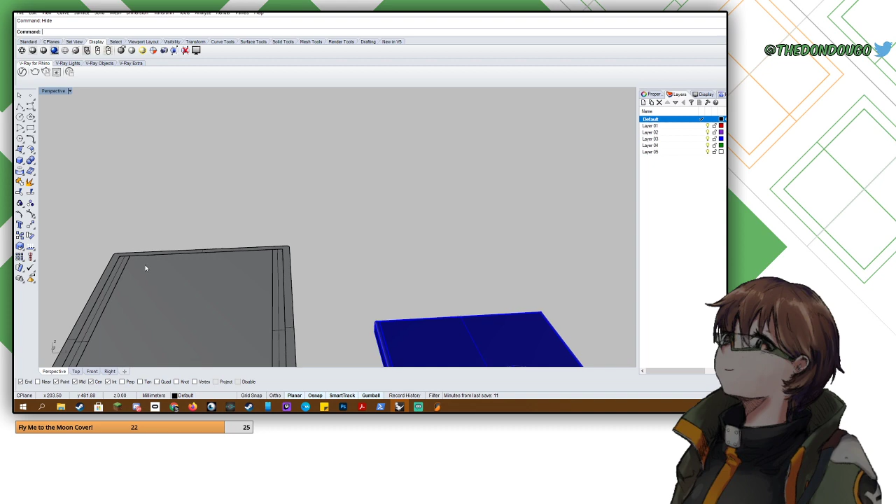Hide that again, and this. Okay, guess we're just gonna build our little box again. That works fine for me.

Do this as a 3-point box. There we go. Don't want to go to center. Want to go to there.

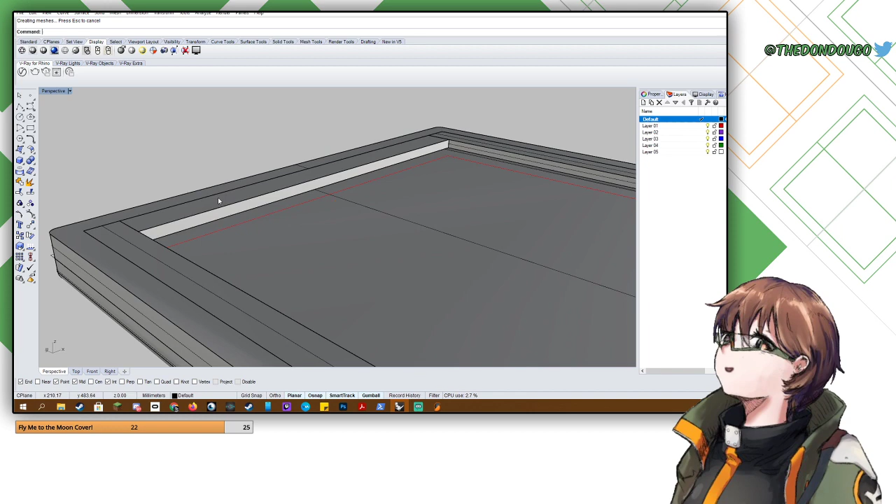Boolean union. Okay, that's good. So now should be able to join these back as well. Boolean union. Okay. Show just one last time just to confirm that there's no weird edges.

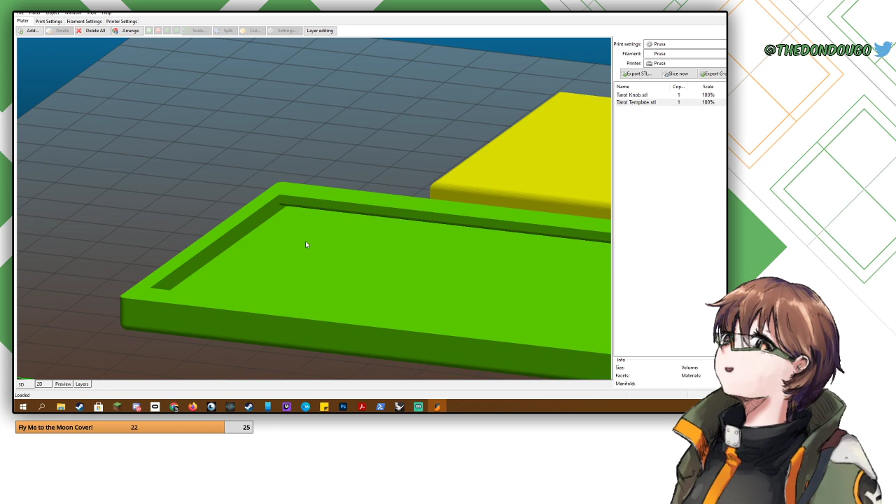And cool. File, export selected. Tarot template, gonna replace it. And there we go. Now we go back to this program. Good thing I noticed that. Gonna delete that, put this in. And okay.

Final steps we need to do: we're going to prep the parts for 3D printing. So print settings, infill, 30% is way higher than we need for this, we're gonna do 20. Hilbert Curve's been working recently on this 3D printer, so we're gonna do that. Fill pattern honeycomb is more than we need, we're just gonna do grid.

Cool, then layers, layer height. We're gonna do 0.3. This is not like a super precision piece. You know, we'll do 0.25. That's at least a little cleaner, and it's a nice number. Perimeters 3, solid layers. Cool.

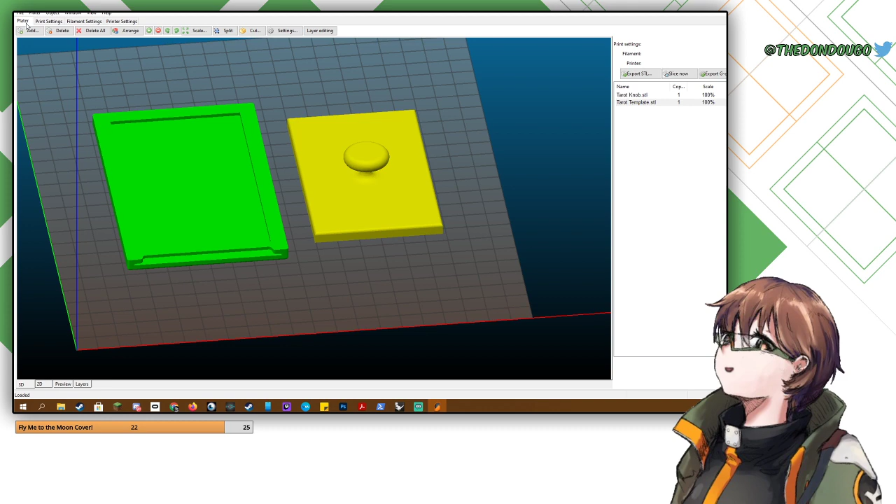And now, if we slice, we can go to preview. Did Hilbert infill. We want top bottom pattern to not be Hilbert. We want... Archimedean chords is what I like. Slice again.

Ooh, the slicer's taking a while. Okay, preview. And there we are. So we can see that's now all the layers needed for this 3D print.

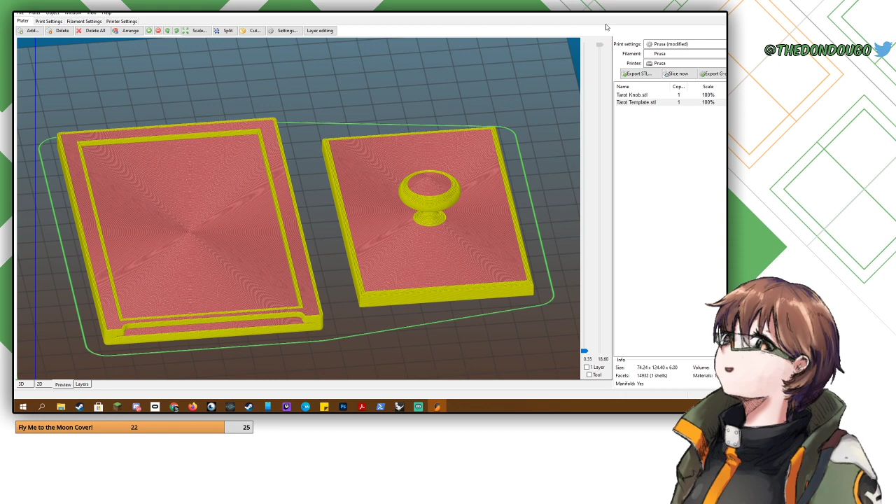Okay, technically I think it still needs supports, so we'll have it auto-generate supports. Yeah, because that overhang's too high, or too steep, and that's also just like a flat line. So print settings, we want support material, generate support material, yes.

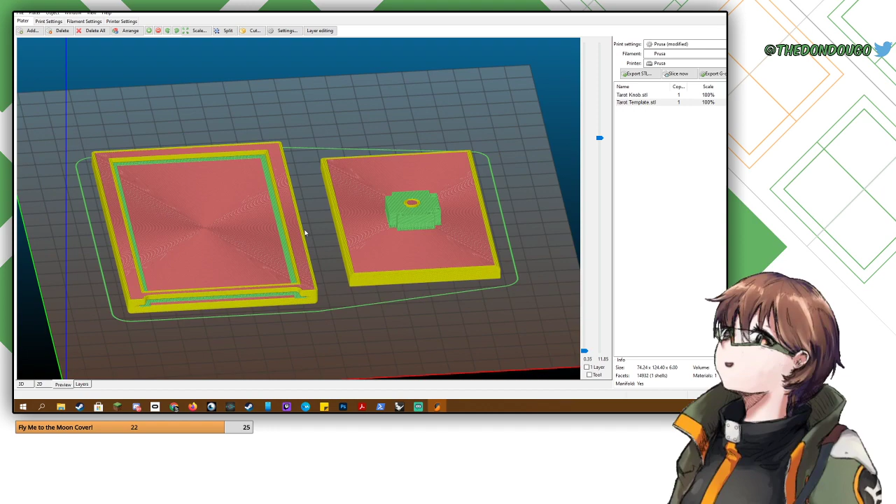Okay, one more time, slice. And there we go. Now there's a lot of very tricky to remove support material. What did it decide to do down here? Yep, that's going to be a real pain to remove, but it'll work.

And just like that, in 40 minutes and 55 seconds, we created something from an image to literally ready to put on the 3D printer.

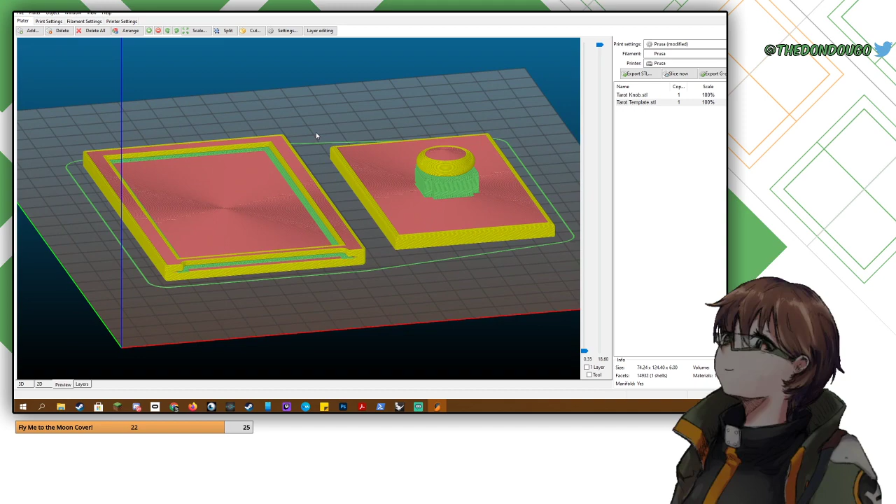It really doesn't... I could have done this without really cutting-edge 3D modeling software. There's definitely things like Tinkercad where you can basically do this whole process online for free. So it's pretty nifty.